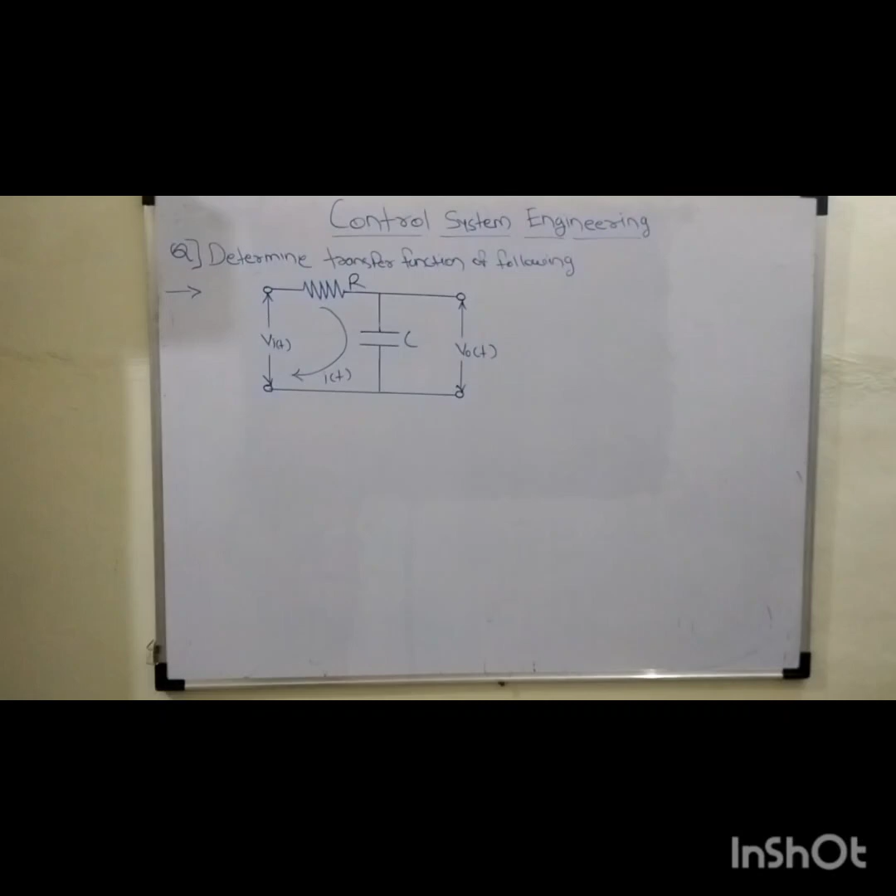Friends, as far as today's session is concerned, we will try to discuss one of the most important parameters of this control system, whose name is nothing but transfer function.

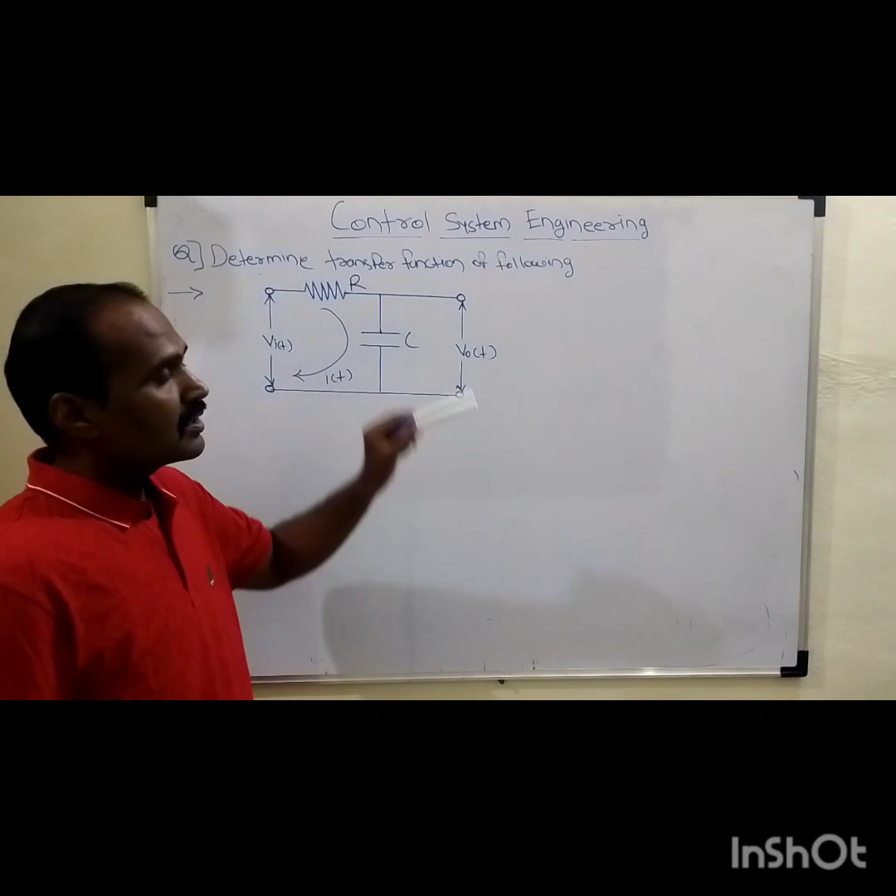As you can see with the help of this graphical representation, we have one type of electrical network with us. Apart from this electrical network, our objective is to determine the overall transfer function of that given electrical system. As we know, this system is nothing but an arrangement of different physical elements connected in such a way that to attain a certain objective out of it. So such type of electrical network we are having with us.

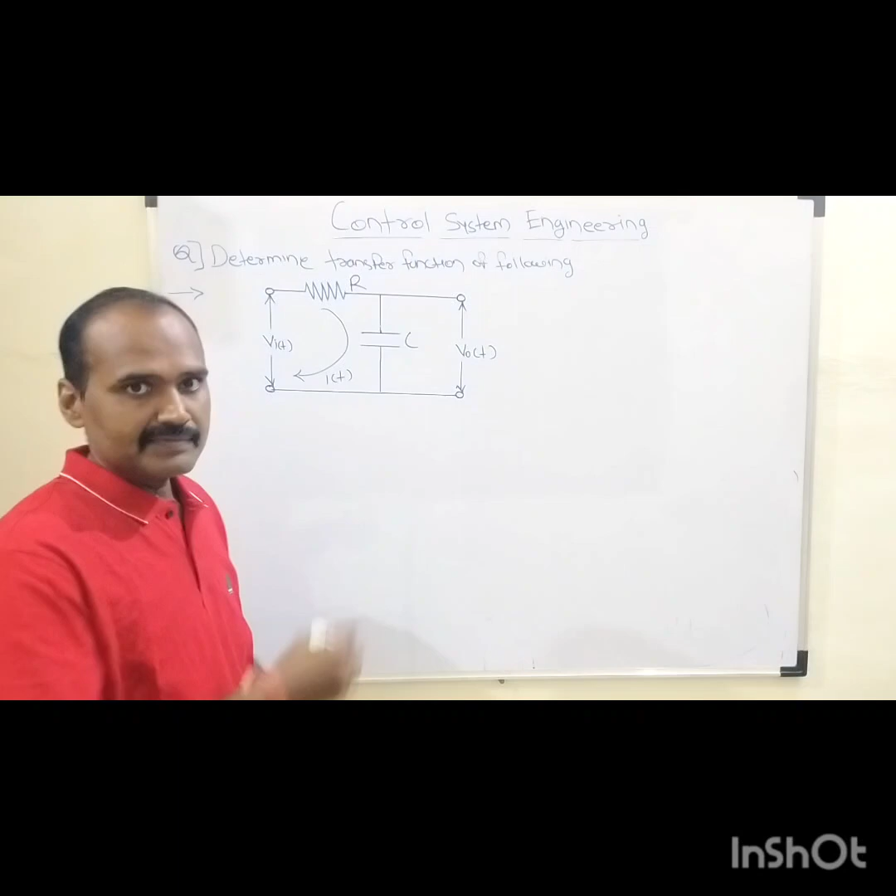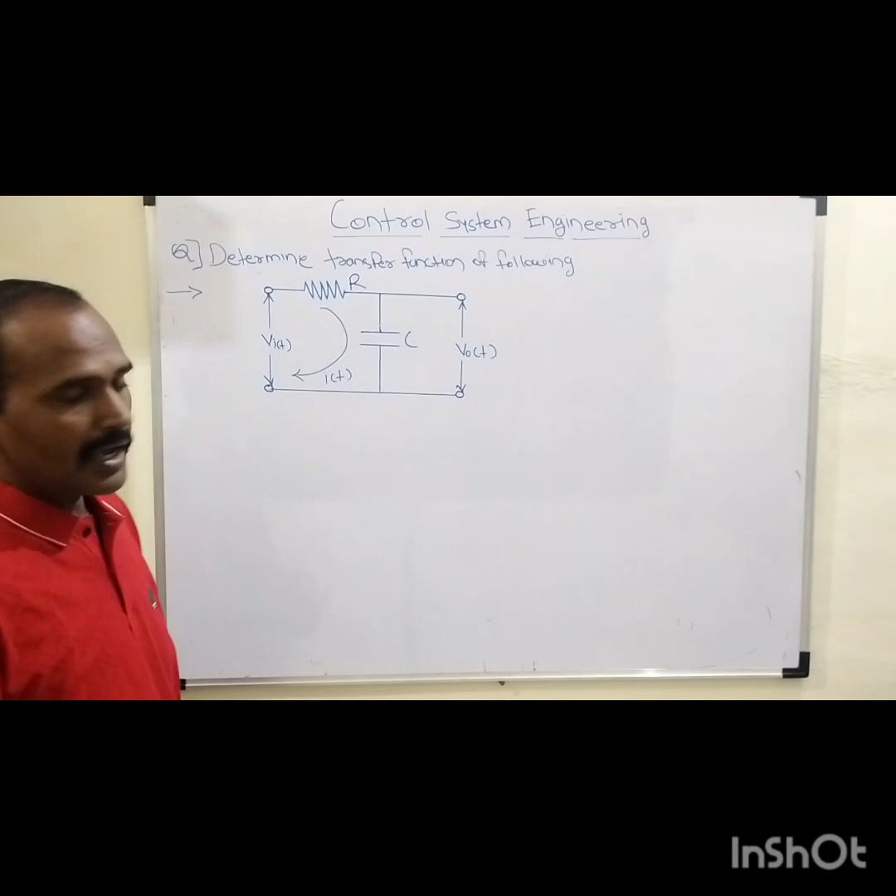Here first of all we need to recall the basic definition of this transfer function. As we know, transfer function is nothing but, it is just similar to the gain of that amplifier circuitry. So the transfer function of this given electrical system is the ratio of output of that system to the input of that system in case of S domain.

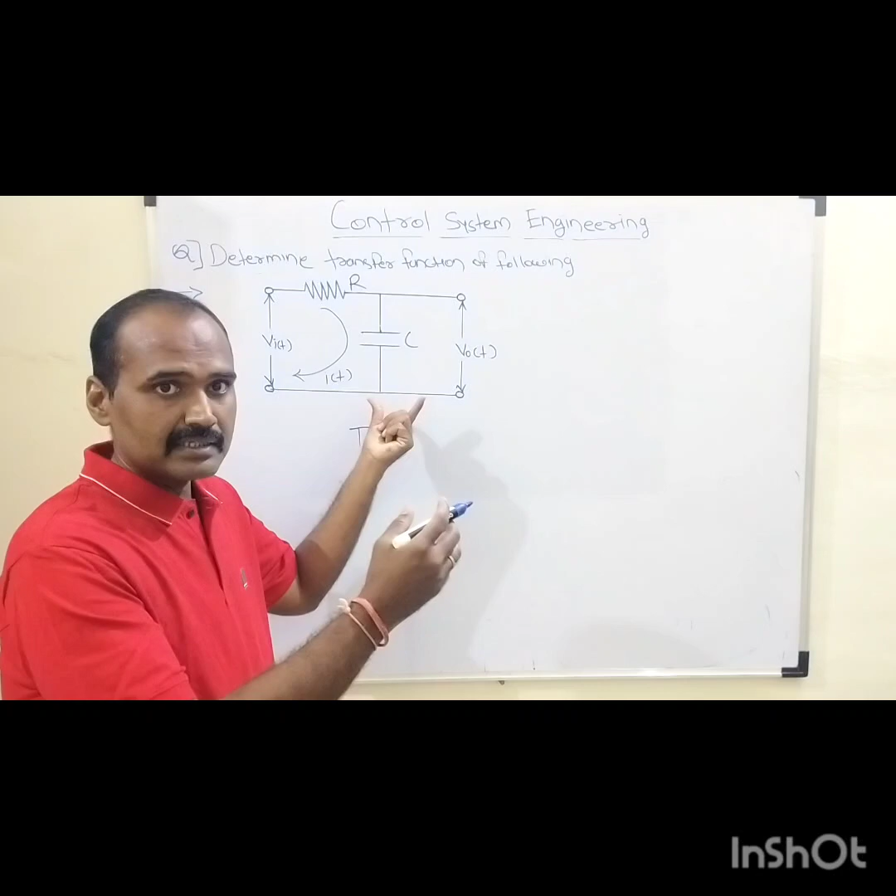But we need to understand that this transfer function is being defined under a zero initial condition. That means, when the overall system is at rest condition, or more prominently we can say that none of the energy component is being stored within each and every element of that system. Such a condition can be called a zero initial condition.

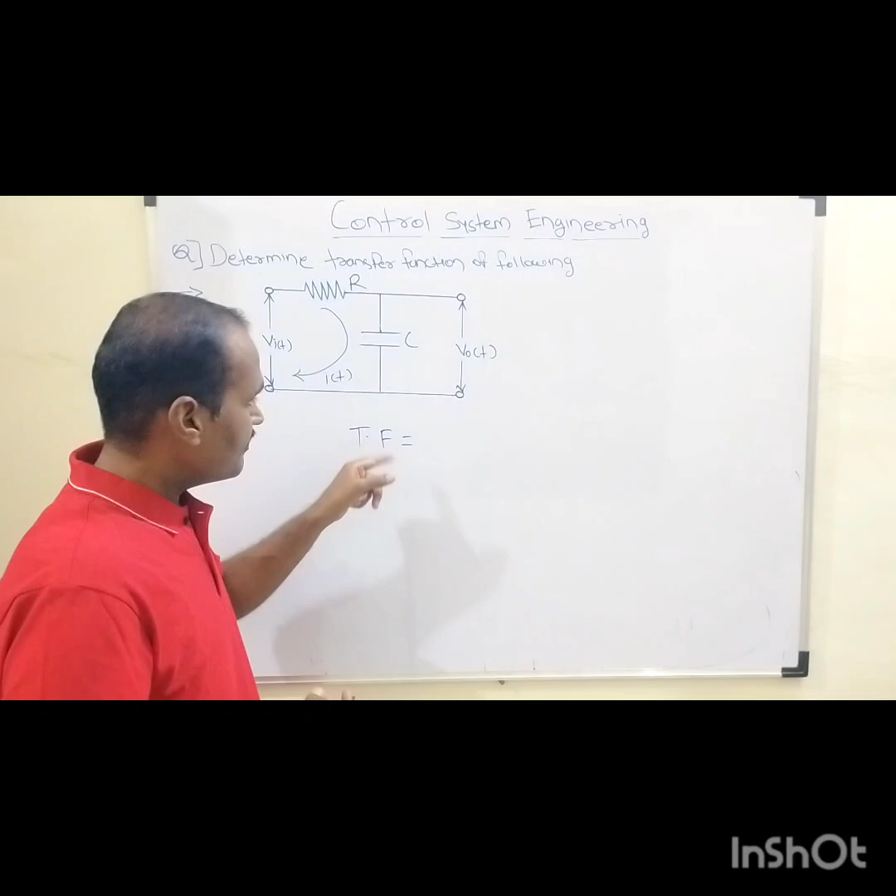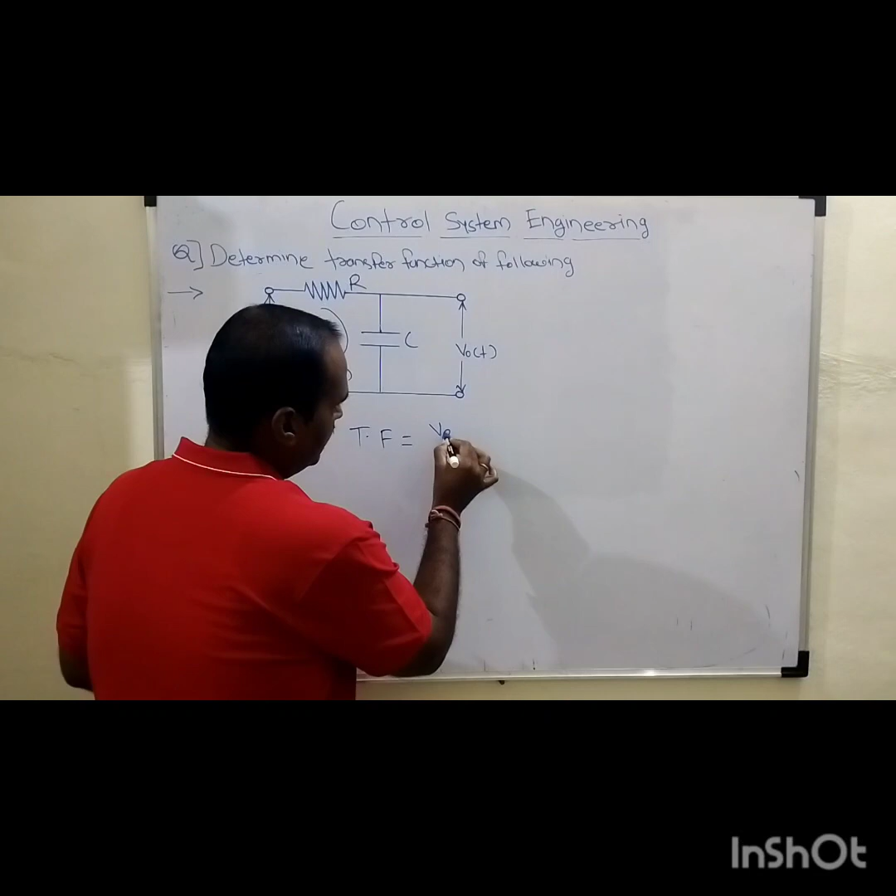So transfer function is nothing but the ratio of output to the input, in terms of S domain. Here output is V0 of t, so its S domain representation will become V0 of S, and the S domain representation of that input is Vi of S. So we are interested to determine the output voltage in terms of S domain and the input voltage in terms of S domain.

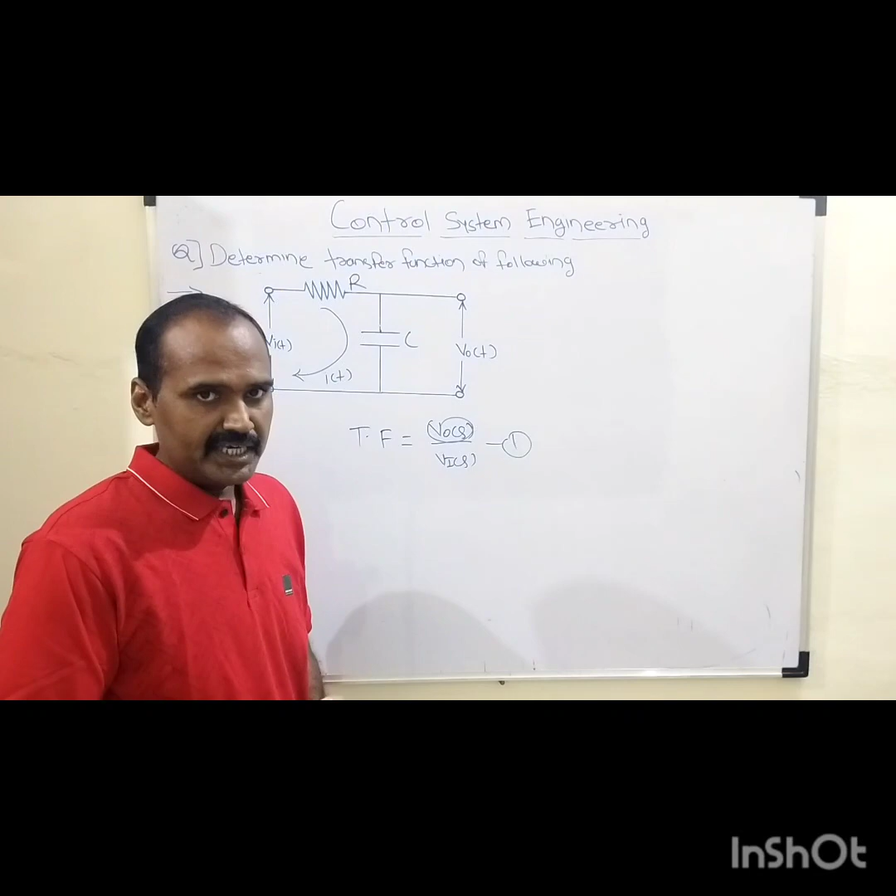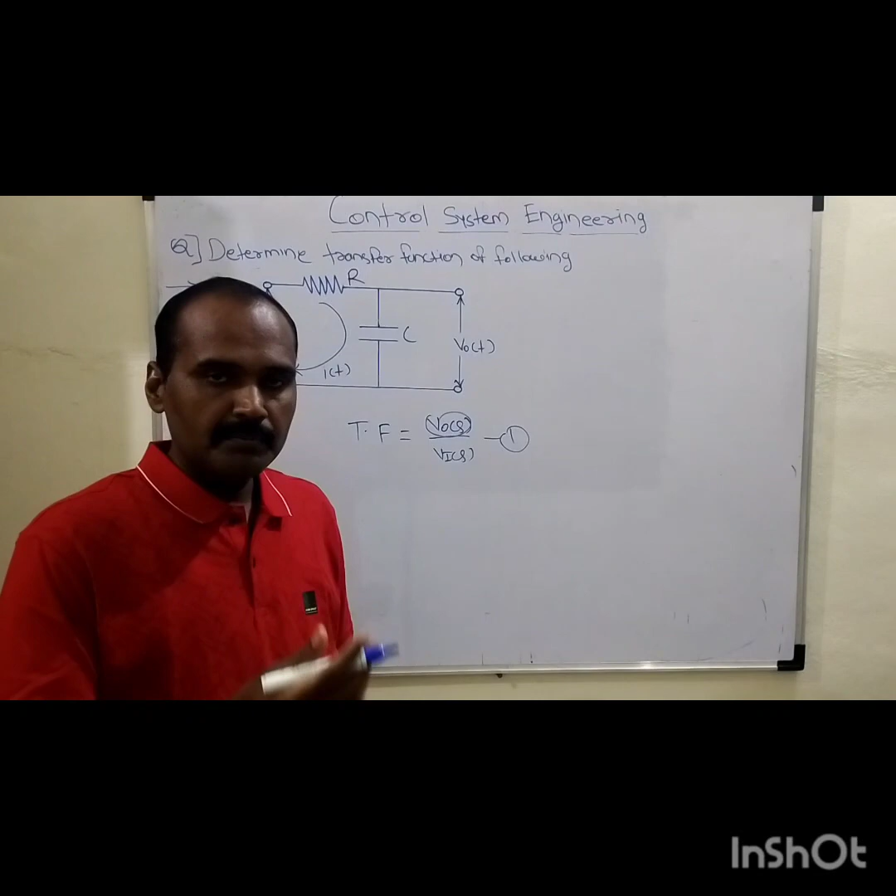Okay friends, so after going through the basic definition of this transfer function, the next thing which we need to do is to determine the time domain expression for this input voltage as well as output voltage.

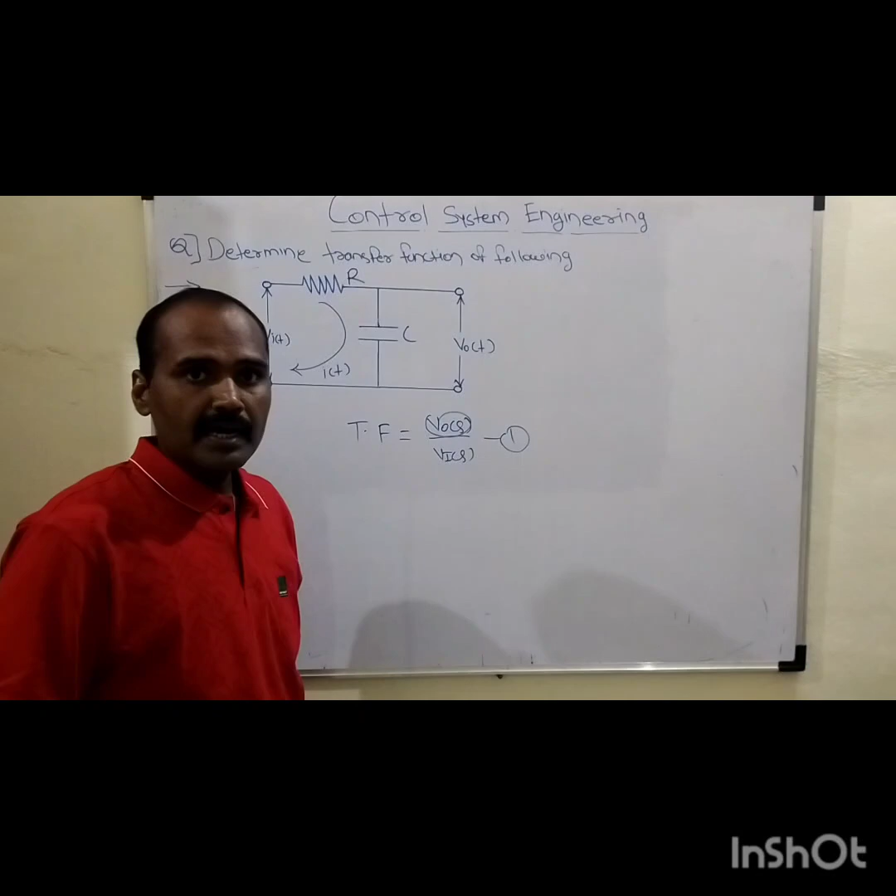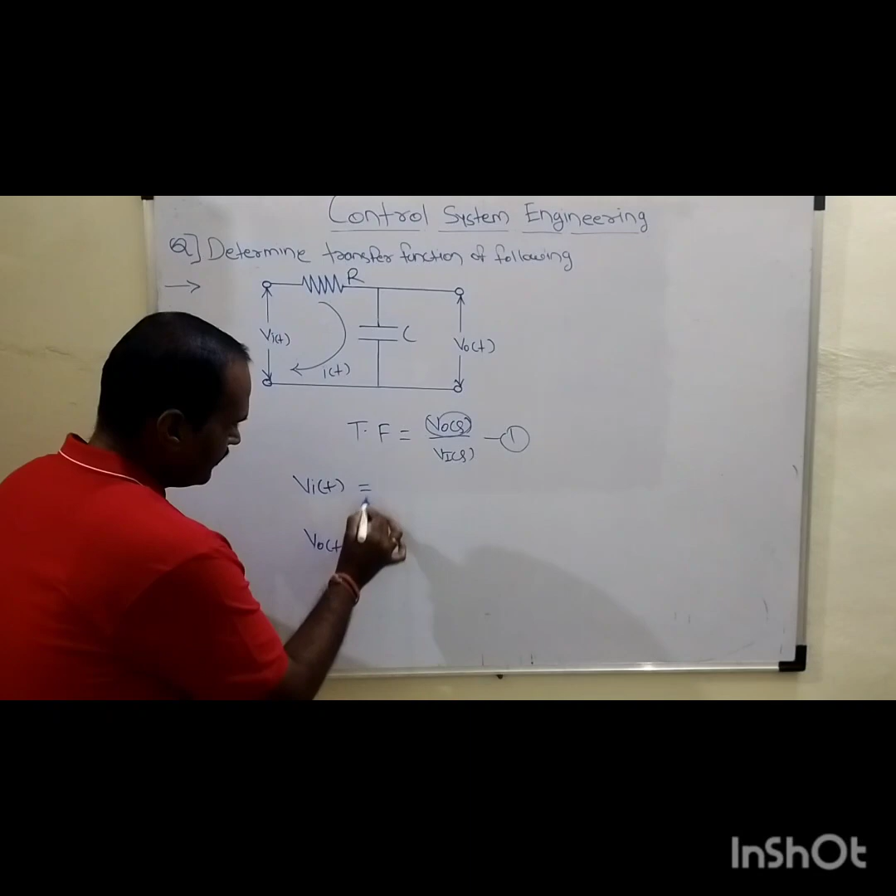As you can see, there are two different components, and obviously these two are connected in series form with each other. Taking into account this circumstance, first of all we need to determine the time domain expression for this input voltage as well as the time domain expression for this output voltage.

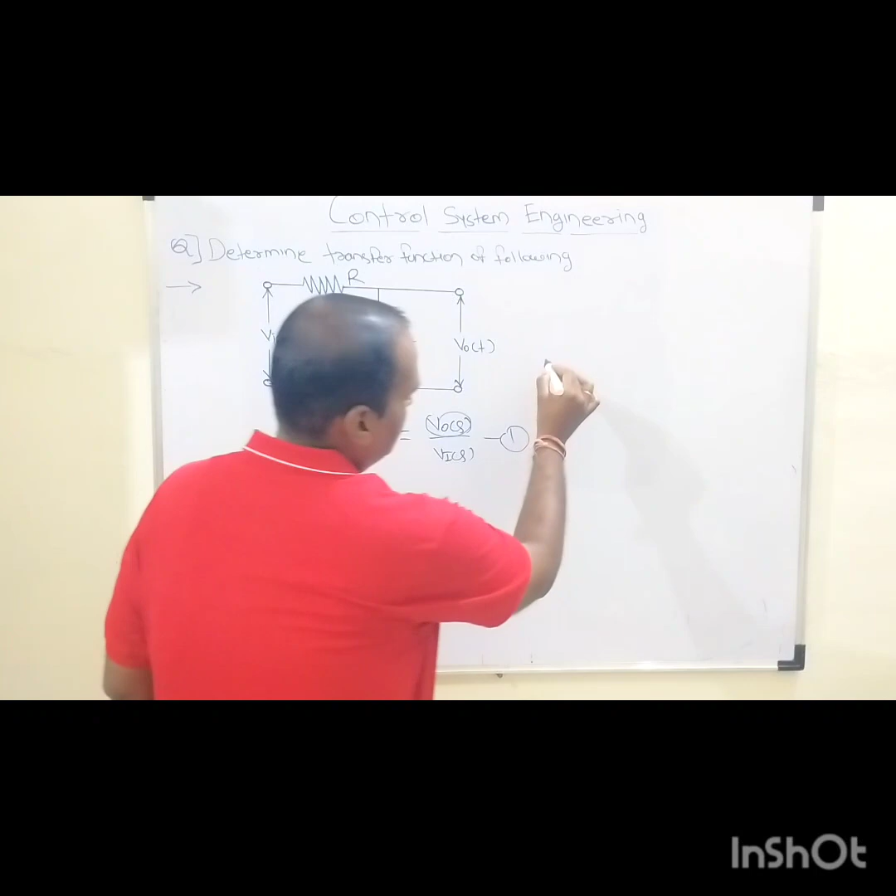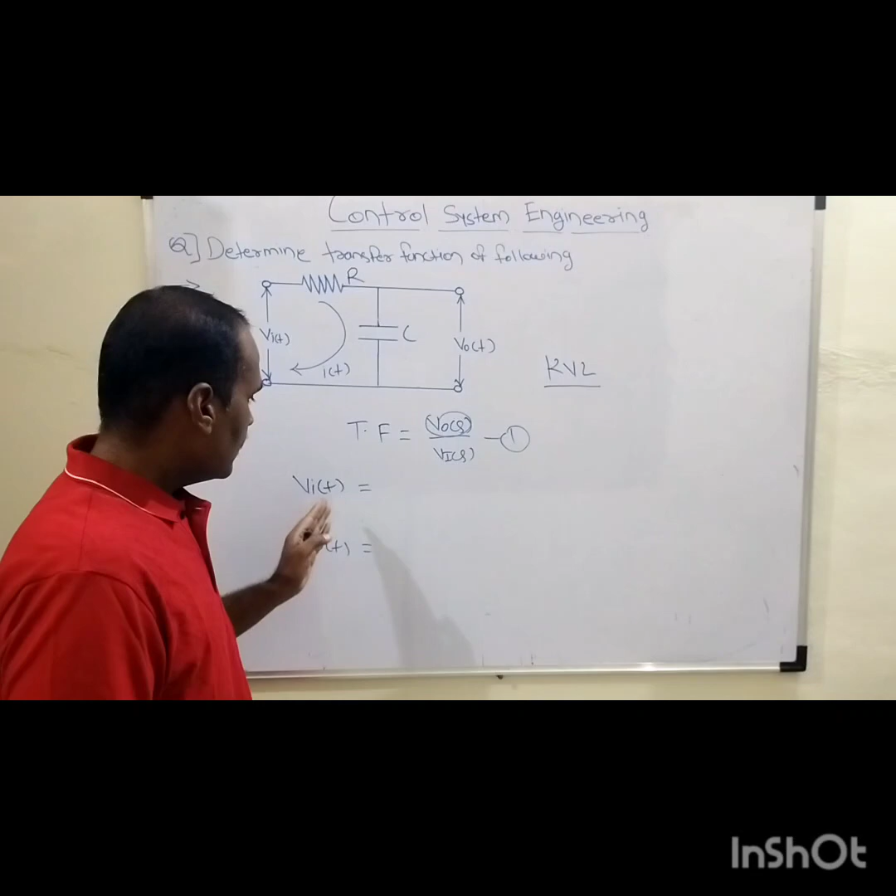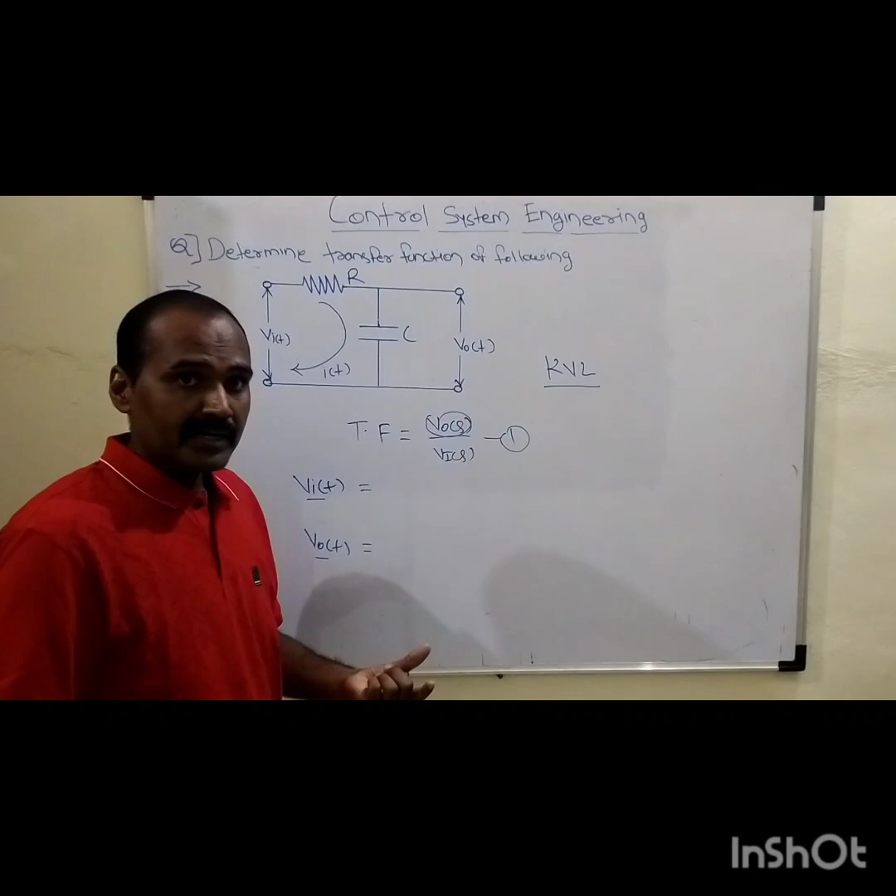In order to determine these input and output voltages, we need to adopt one basic strategy used in electrical engineering for series circuits. The name of that strategy is the Kirchhoff Voltage Law, or more prominently we call it KVL. By the virtue of this Kirchhoff Voltage Law, we need to determine the time domain expression for input as well as output, because the S domain representation of this input and output voltages are required to determine the overall transfer function.

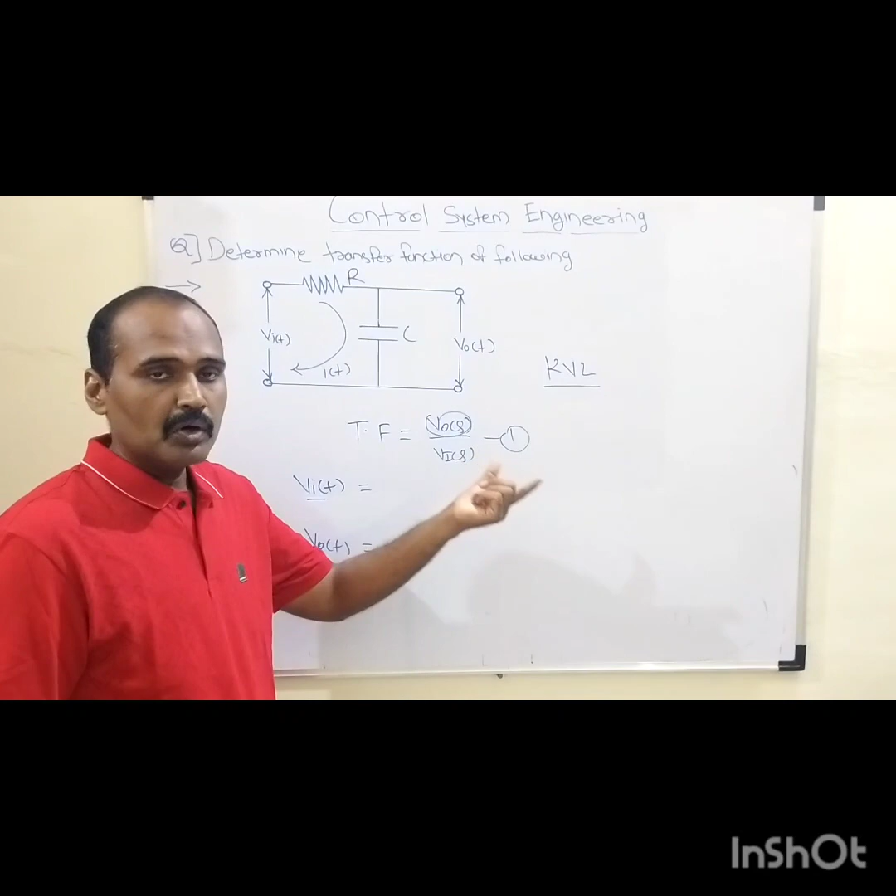As we know, the Kirchhoff Voltage Law is a very simple strategy: the algebraic sum of all ohmic drops are always equated to zero. So when we apply this Kirchhoff Voltage Law to the input side as well as to the output side, let us quickly go through this scenario.

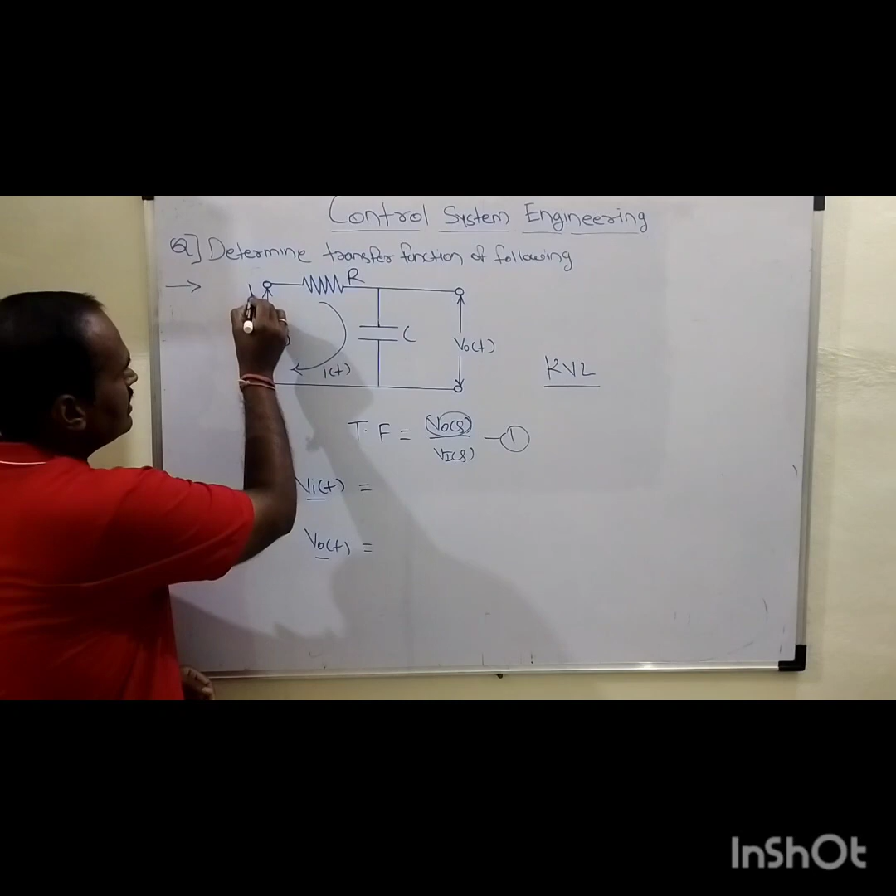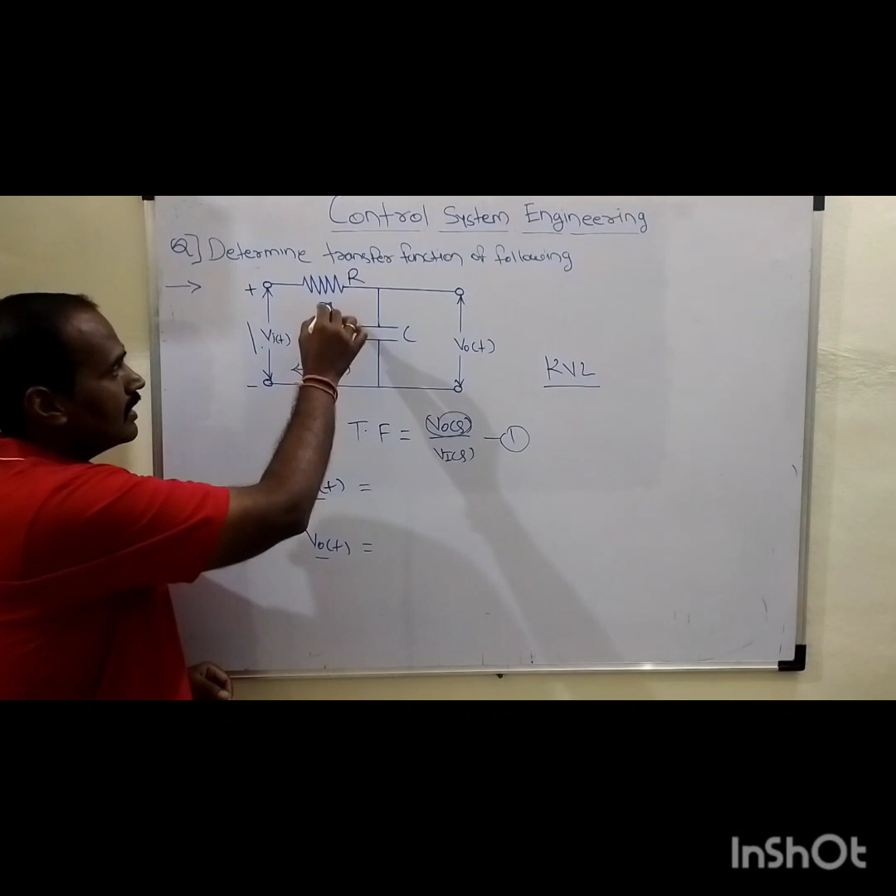When we apply this Kirchhoff Voltage Law from the input side, obviously this is the positive terminal and this is the negative terminal. First of all, that Kirchhoff Voltage Law is applied to this input section. In this input section we have one desired potential, that is Vi of t. The remaining two elements are the resistor and the capacitor.

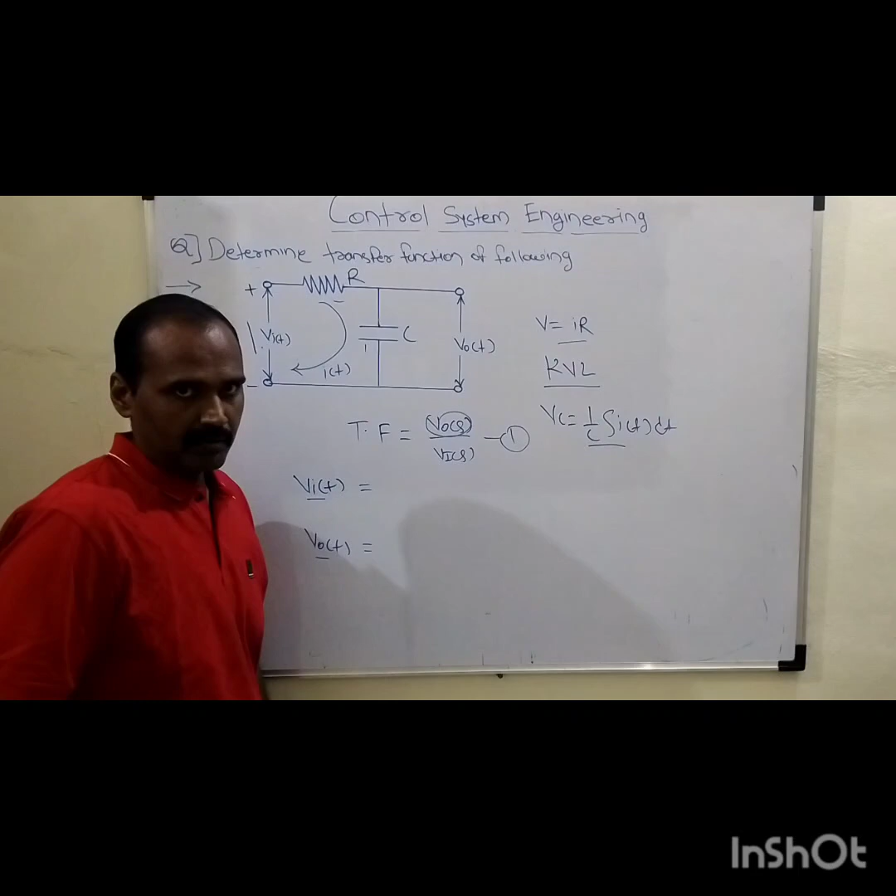According to Ohm's law, we are very much aware that the voltage drop across this resistor is simply I into R, that we need to recall. Similarly, the ohmic drop across this capacitor is 1 over C integral of I of t into dt. These two statements we need to record, because we need them while defining the input voltage as well as output voltage.

So when we apply this Kirchhoff Voltage Law to the input side, the input current is denoted by I of t. The current always flows from positive to the negative terminal, or more prominently we can say it always flows in the opposite direction as compared to the direction of electrons. The direction of current is always opposite to the direction of electrons, flowing from positive terminal to negative terminal. So the direction of current is here what?

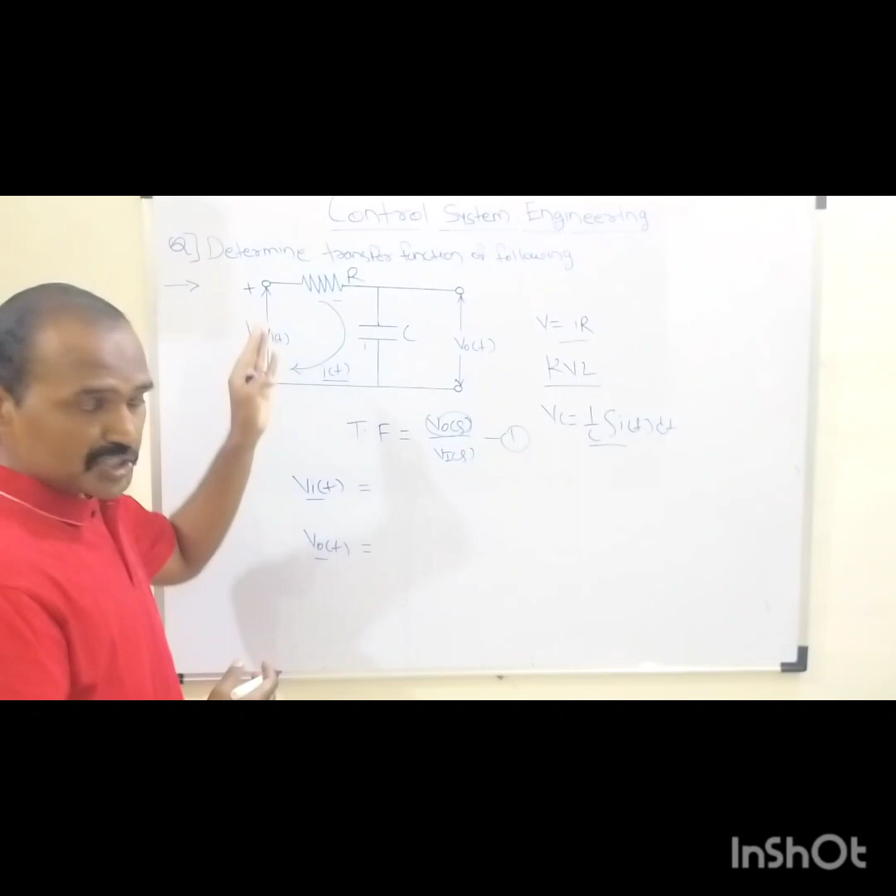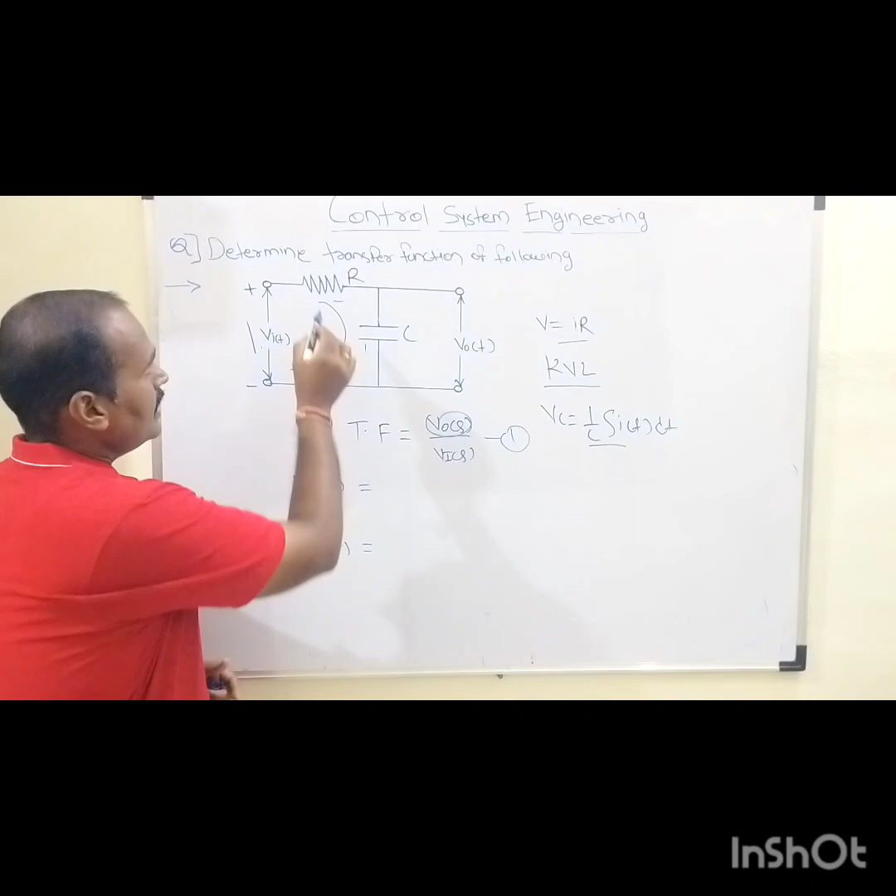Is in clockwise direction. So carefully we need to follow this clockwise direction while applying Kirchhoff's voltage law. So accordingly, how does this I of t current flow through this resistor connected in the horizontal arm? Obviously from its left hand side to the right hand side. So we need to mark the polarity. Similarly, how that current flows from this capacitor which is connected in the vertical arm, from top to bottom, right?

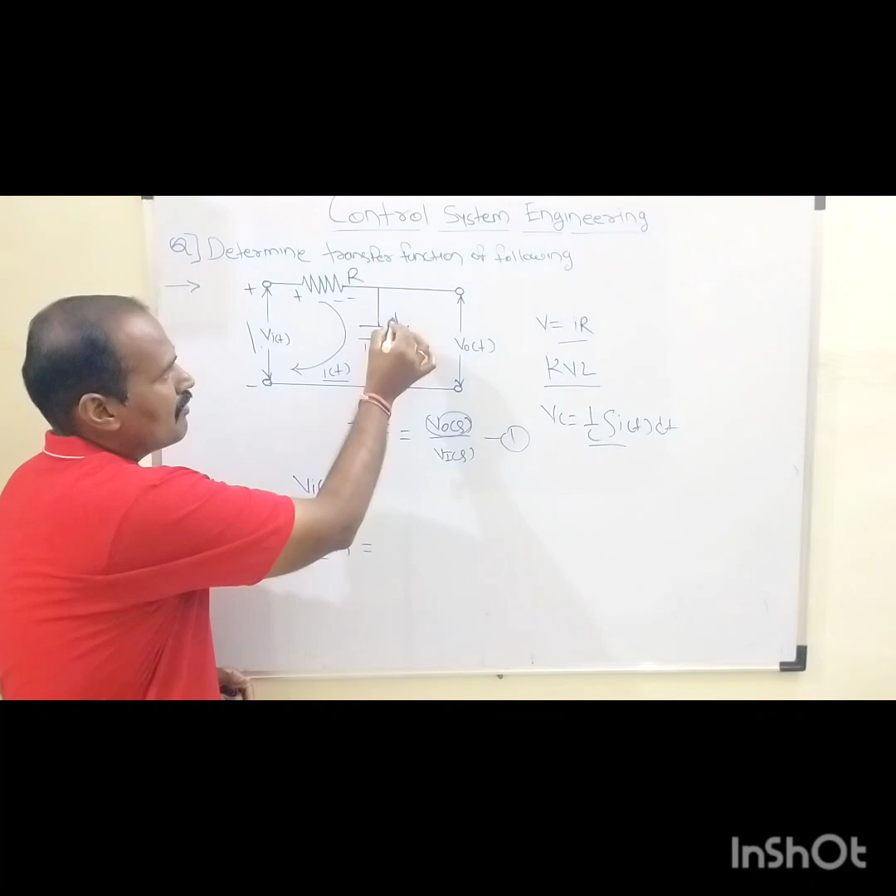So when we apply this Kirchhoff voltage law from this negative terminal, we are going from negative plate to the positive plate. So that's why the overall potential of this Vi of t is nothing but what? It will become positive, right?

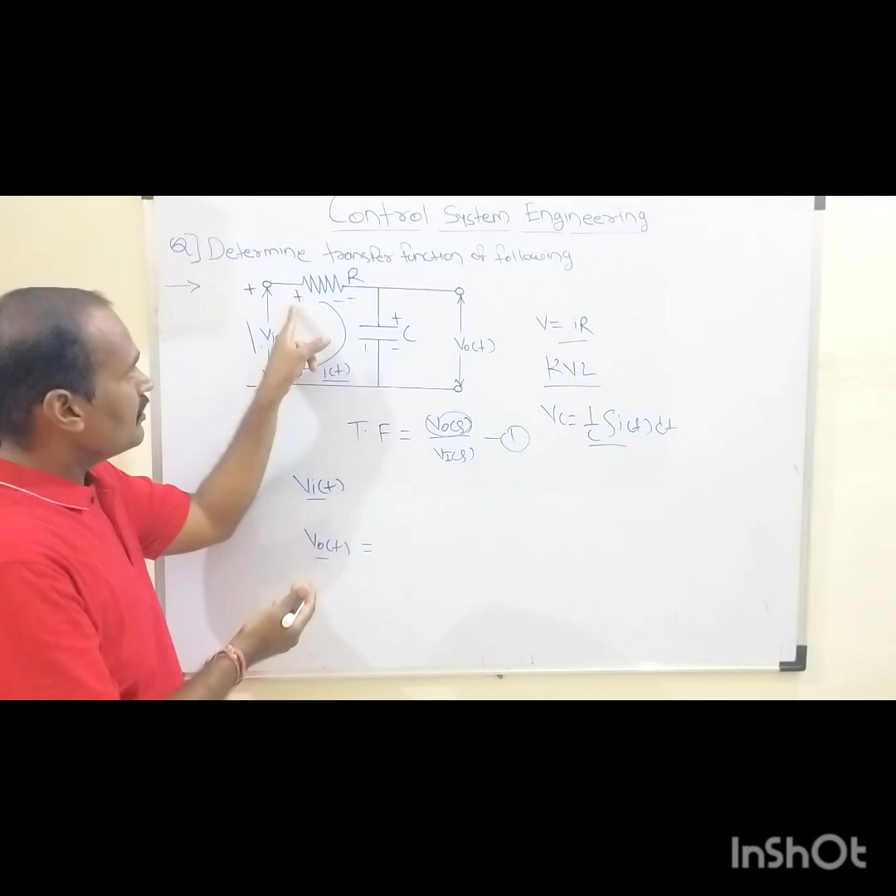When we consider the ohmic drop across this resistor R, at that time we are going from positive to the negative plate. That's why the overall polarity of this ohmic drop across that resistor is denoted by a negative sign. So obviously it will become R into I of t. That is nothing but the ohmic drop across that resistor.

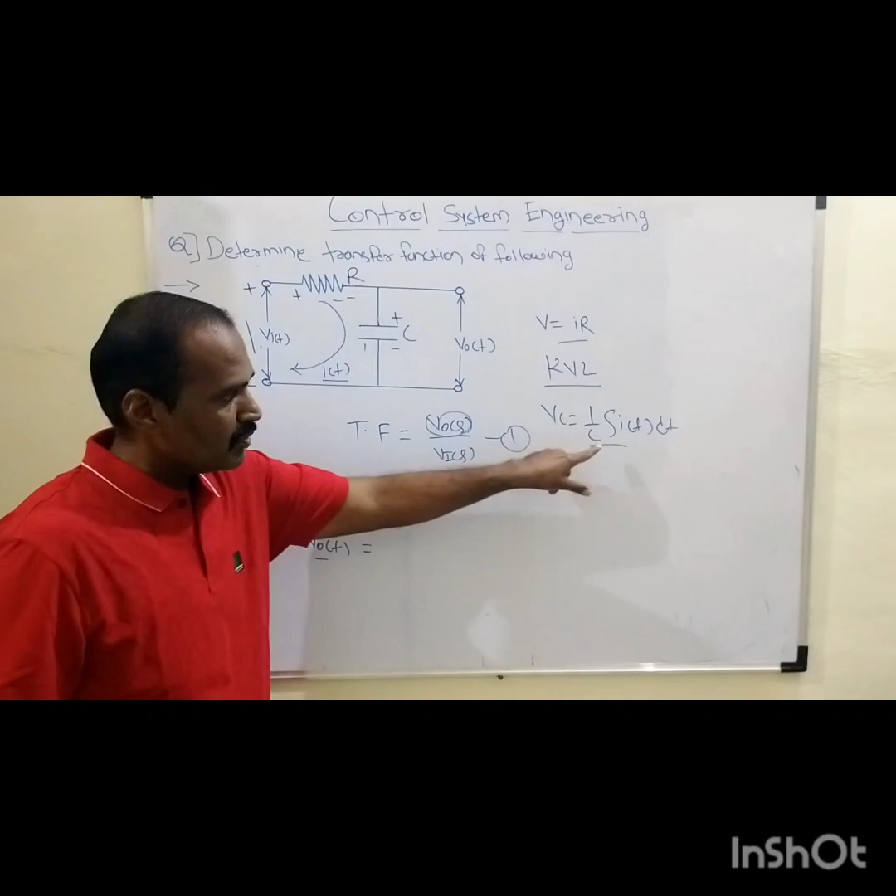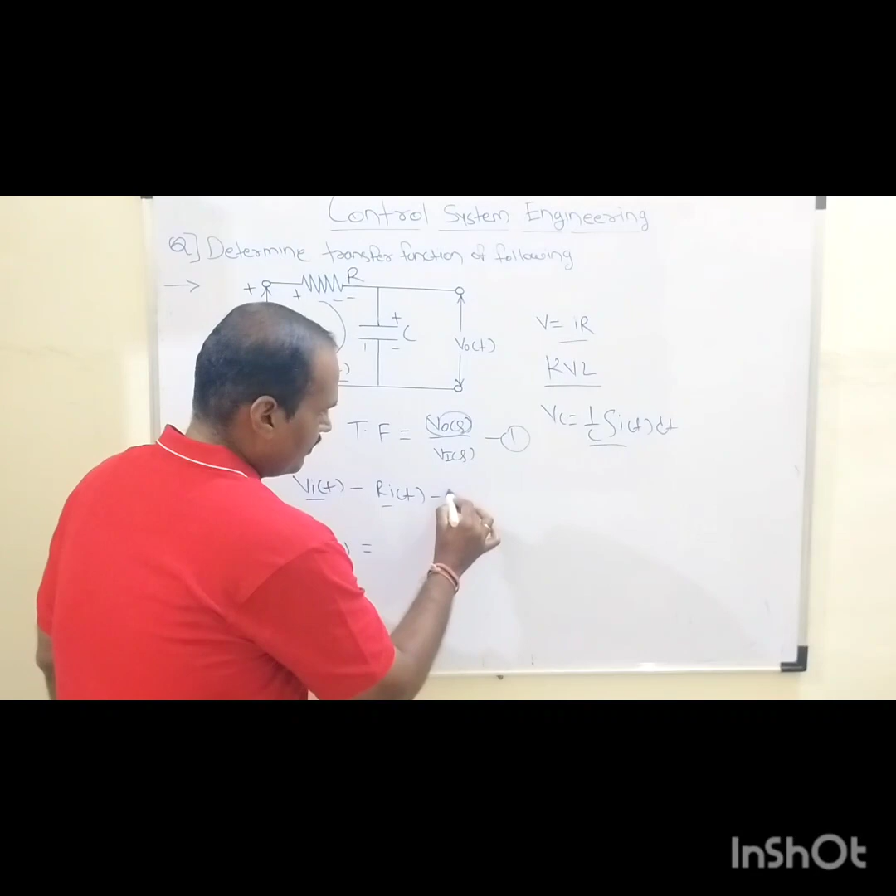Similarly, the ohmic drop across that capacitor, the time domain expression is 1 over C integral of I of t into dt, right? Here we are going from top to bottom side as it is connected in the vertical arm. So obviously the ohmic drop across that capacitor will be negative. So minus 1 over C into integral of I of t into dt. So this is how this statement will look like.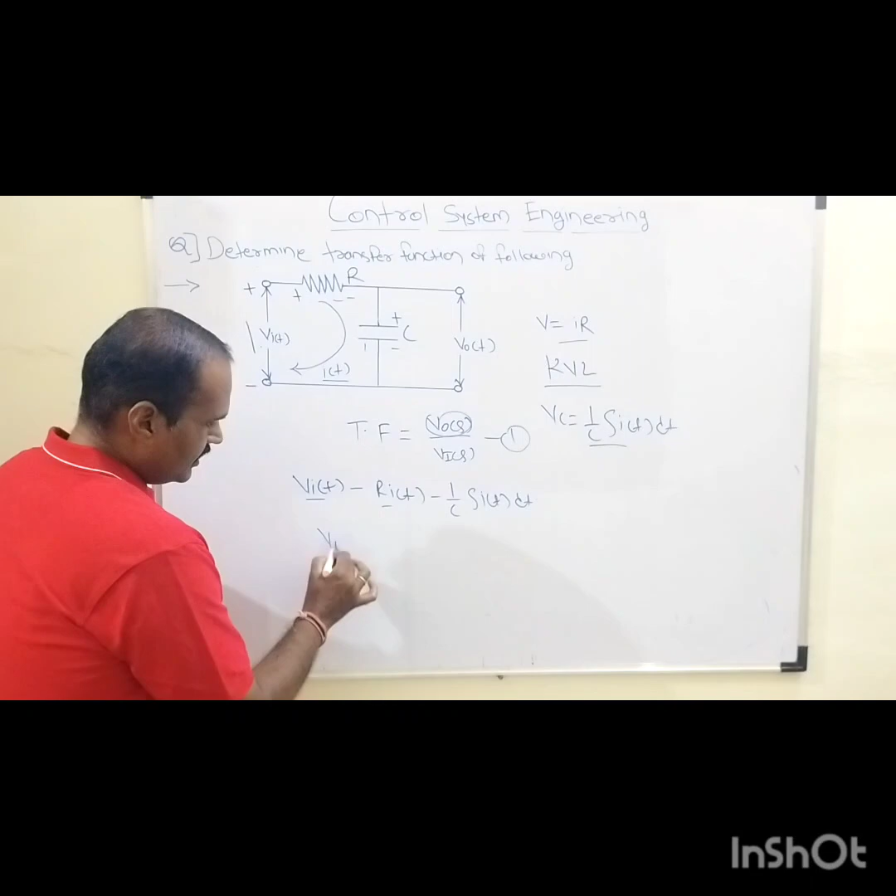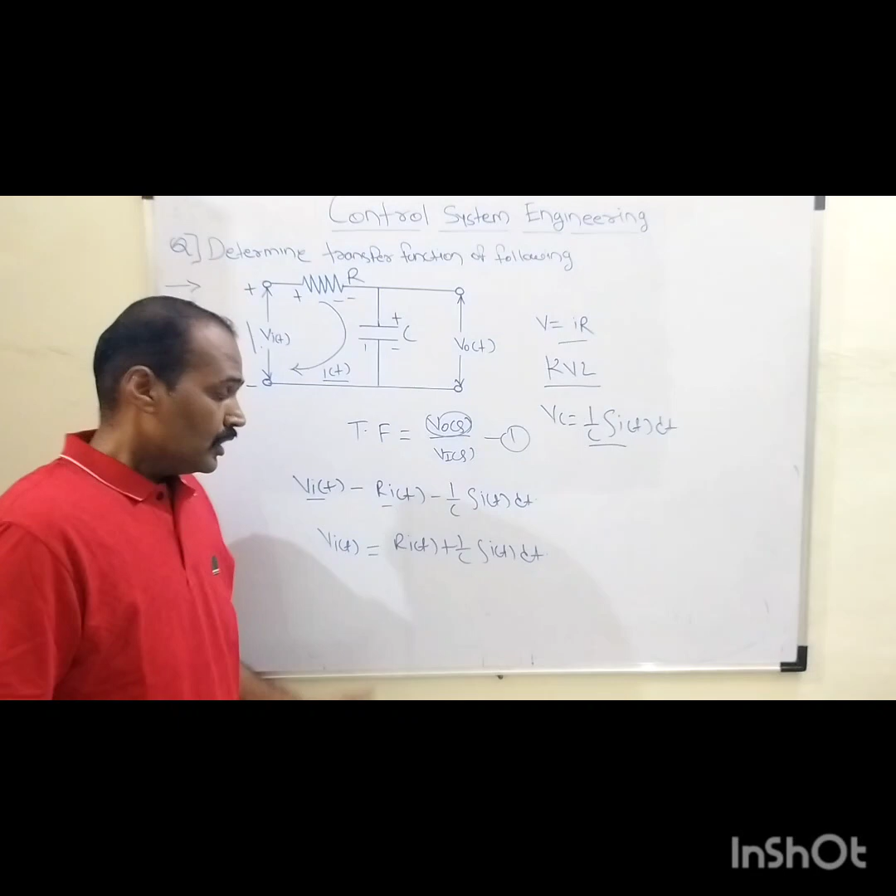When we rearrange this term, we come to know Vi of t equals R into I of t plus 1 over C into integral of I of t into dt, right? So this will become the time domain expression for input voltage.

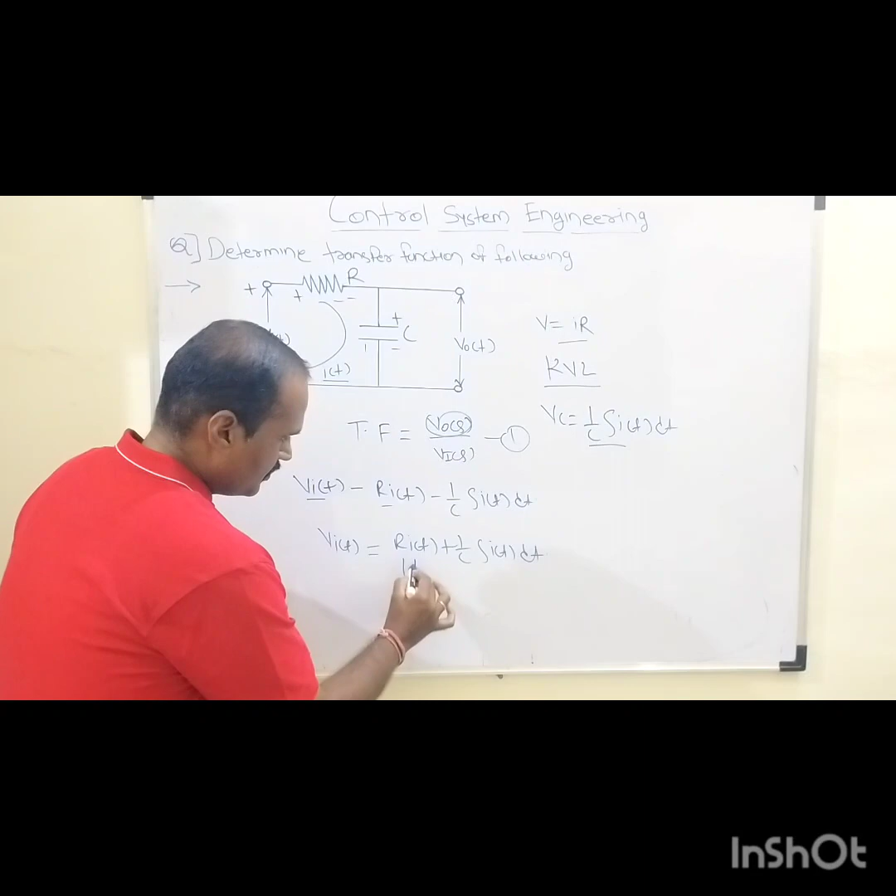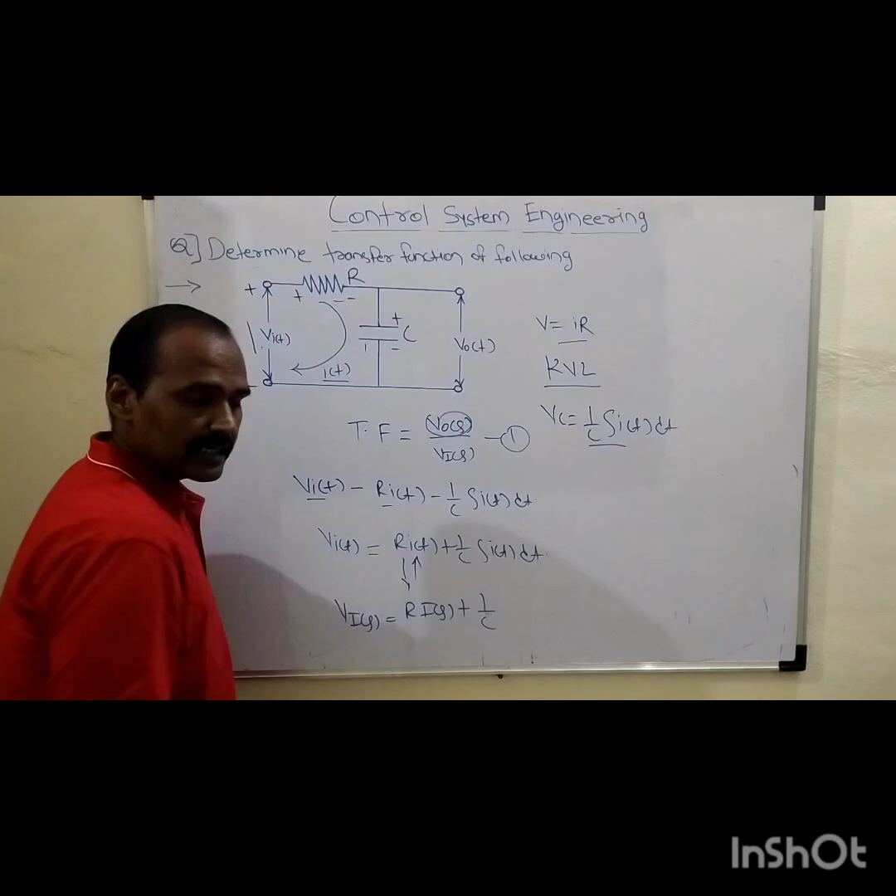We want this input voltage in terms of S domain. So when we apply the Laplace transform to this existing statement, it becomes Vi of s equals R times I of s plus 1 over C, as we are having the integral sign, so the Laplace variable will become 1 over Cs followed by I of s. So this is how equation number 1 becomes.

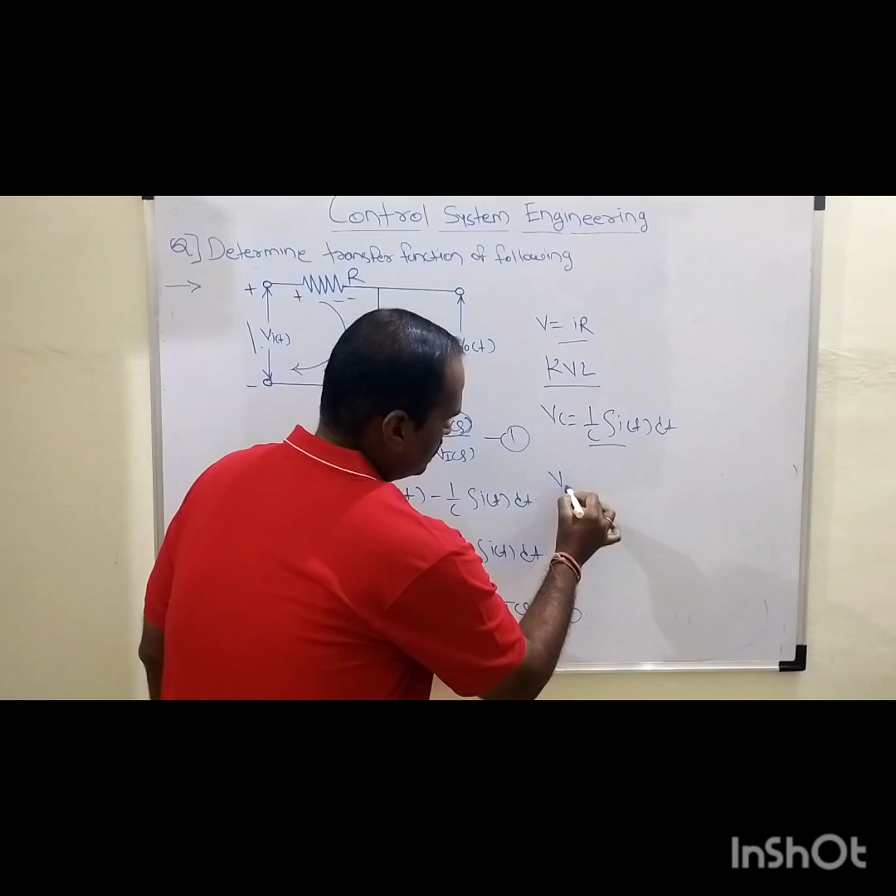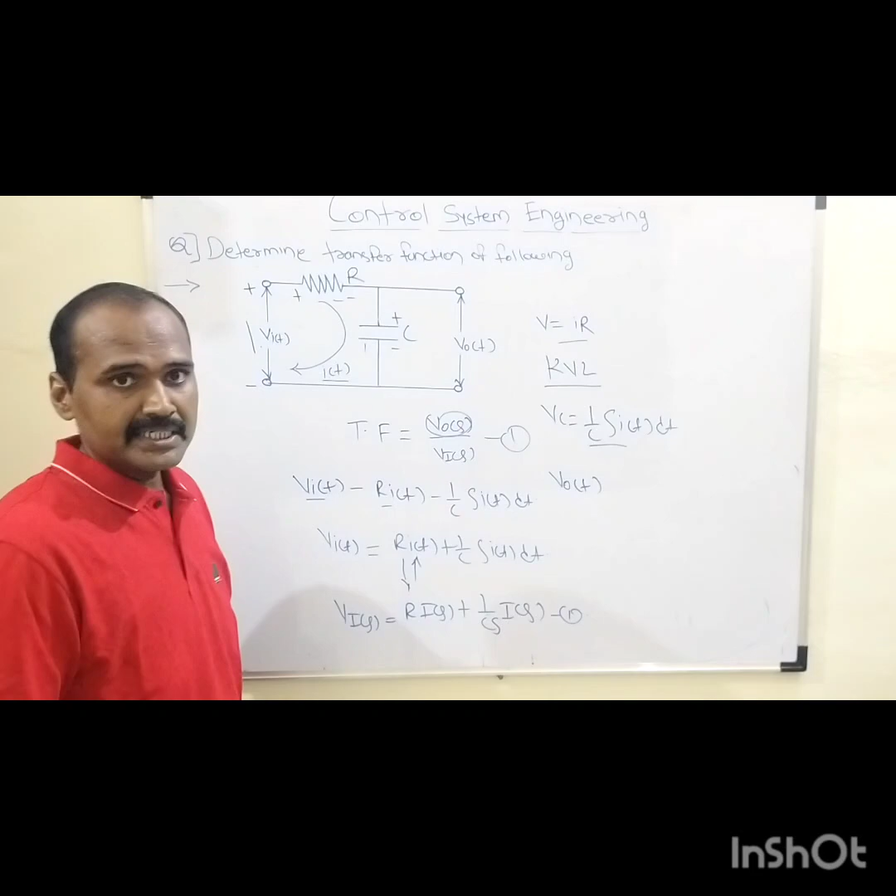In the same manner, when we apply the Kirchhoff voltage law to that output side, similarly such type of expression we are getting on the output side. We are having one potential, that is V0 of t, and the output is obtained across this capacitor C, right? How are we mapping this capacitor? When we apply the Kirchhoff voltage law from the output side, we need to follow these two polarities. We are going from top to bottom, right?

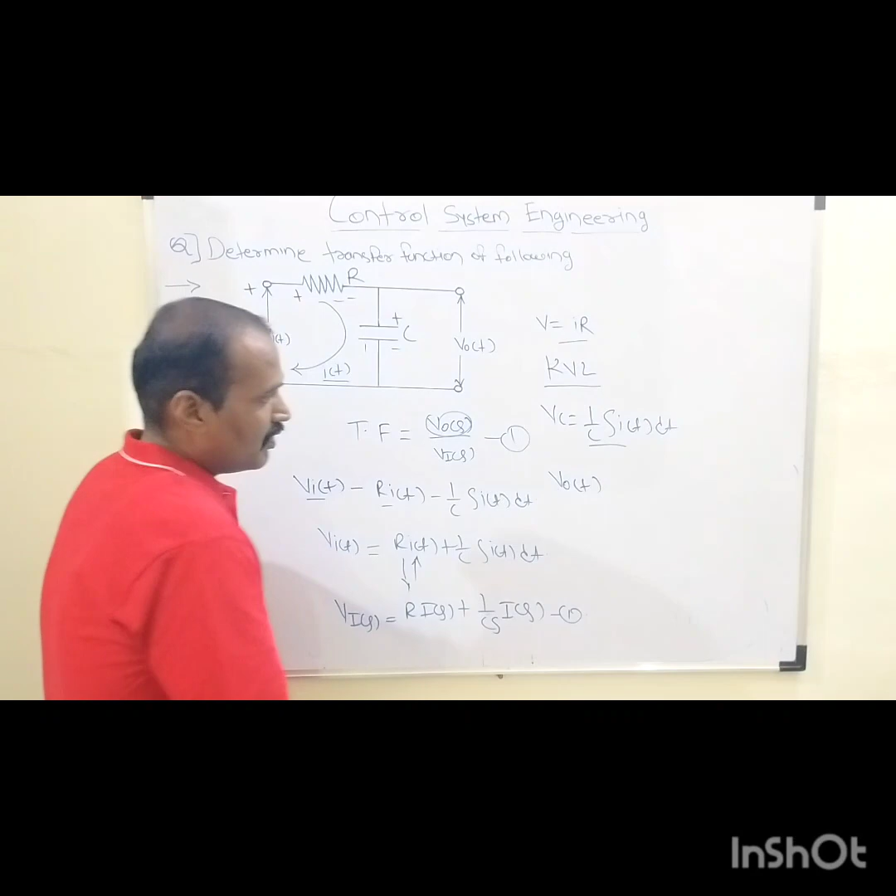So V0 of t minus the ohmic drop across that capacitor, it becomes V0 of t minus 1 over C into integral of I of t into dt. So finally V0 of t equals 1 over C integral of I of t into dt, right?

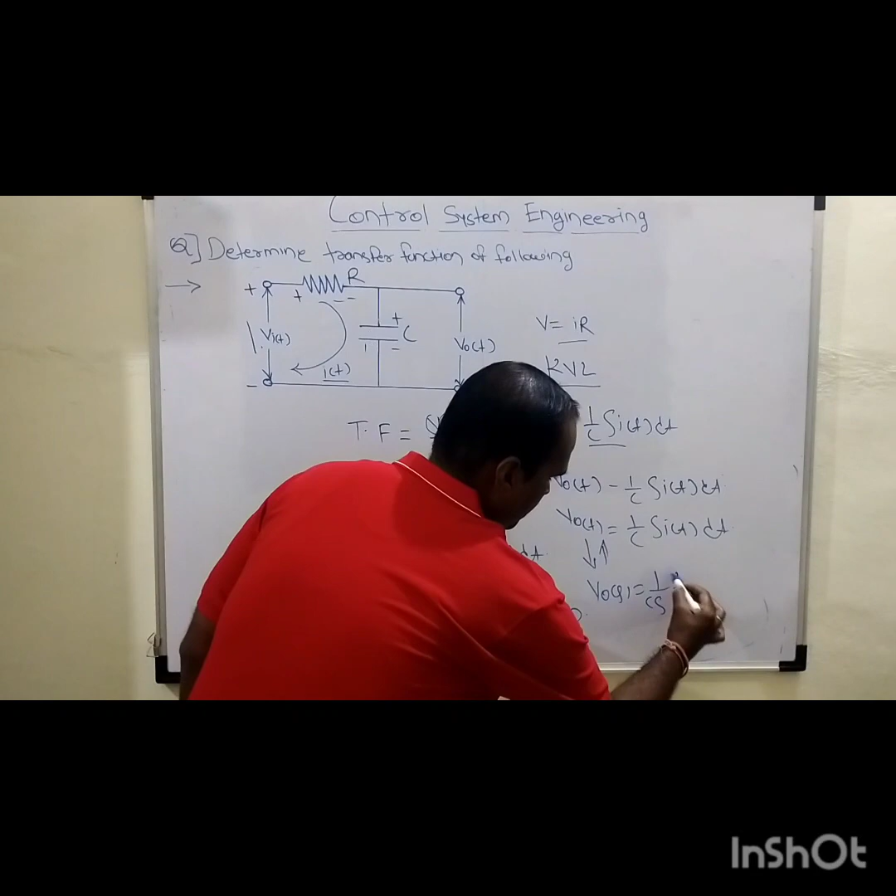And when we apply the Laplace transform, it becomes V naught of s equals, again the Laplace variable will be 1 over s, so 1 over Cs followed by I of s. That can be called equation number 2, right?

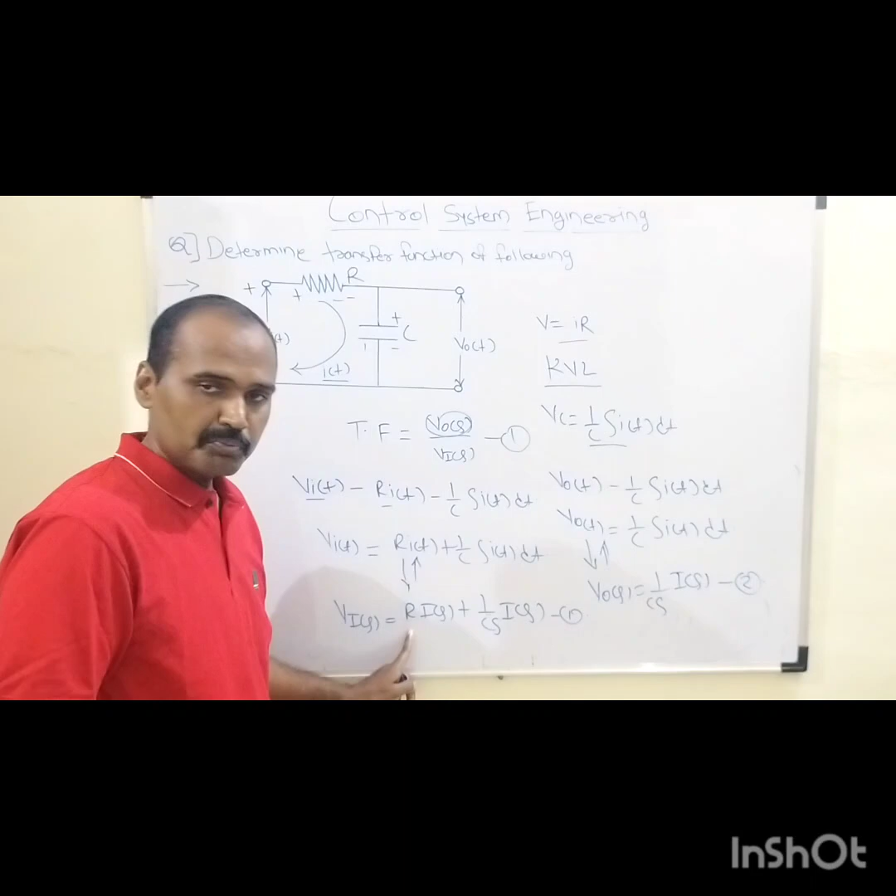Now the transfer function is nothing but the ratio of output voltage to the input voltage in terms of S domain, right? So here when we equate these two equations to determine the overall transfer function, initially we need to consider equation number 2, which is 1 over Cs into I of s. Its denominator will be equation number 1.

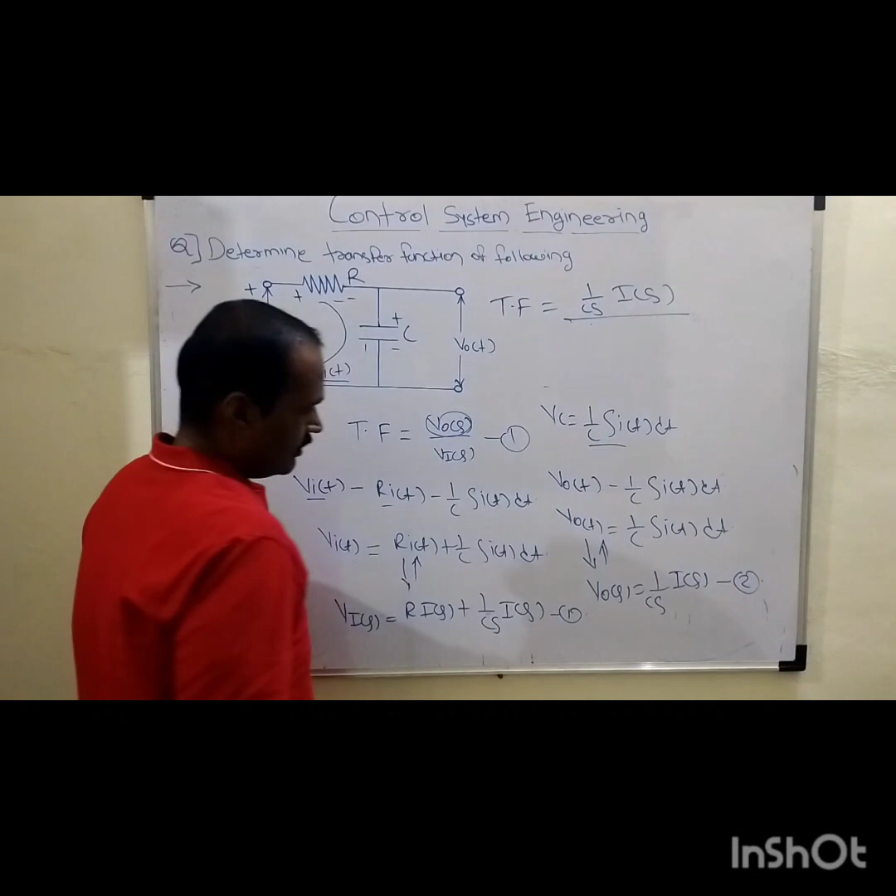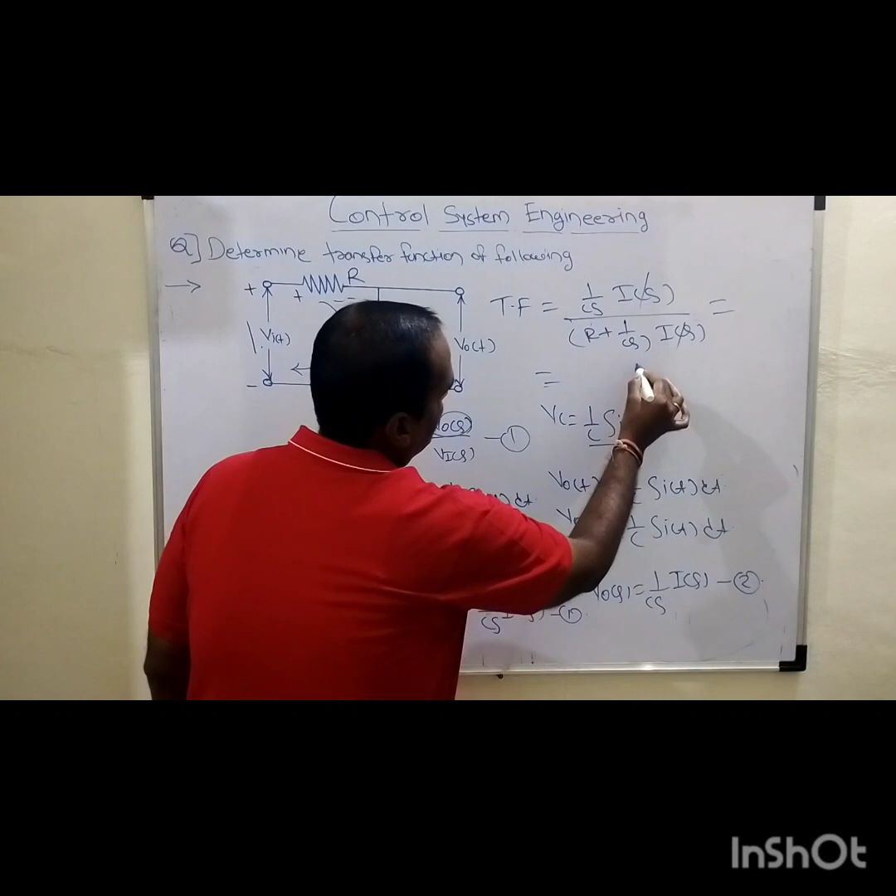Here while considering this denominator, a few mathematical simplifications we need to look out. Here I of s is a common term, so the remaining coefficient will be R plus 1 over Cs, into I of s. So finally this I of s gets cancelled, and again it gets cross multiplied. So the answer is 1 over RCs plus 1.

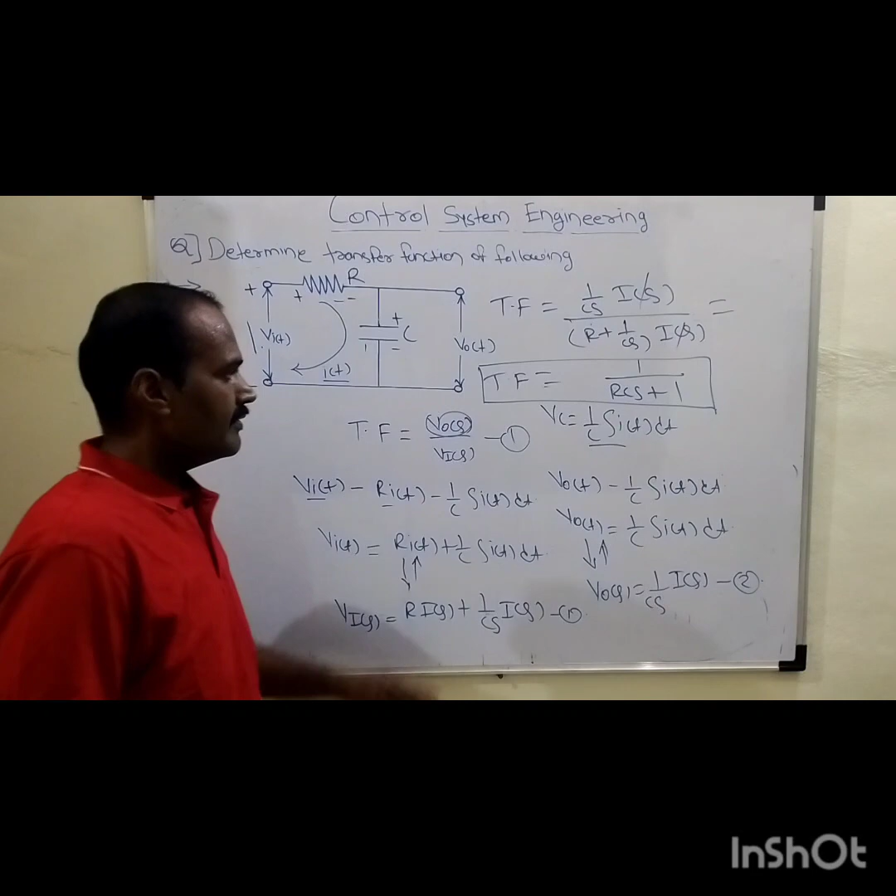The term which is written within this rectangular box is nothing but the overall transfer function of this electrical system.

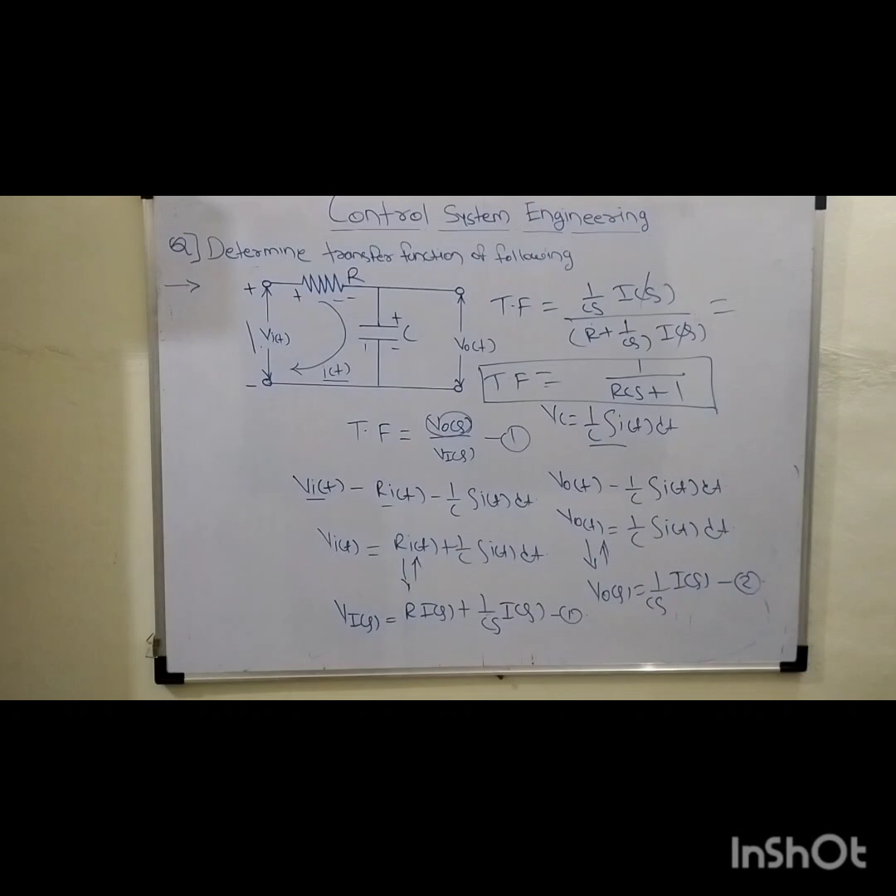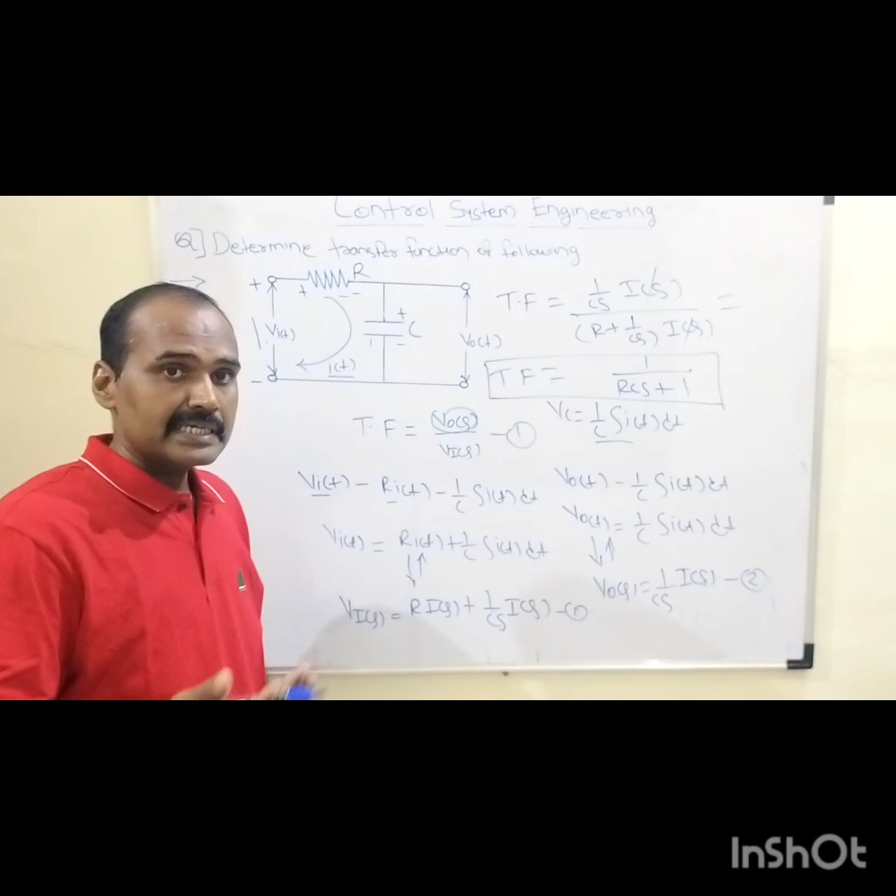So friends, in this way we had tabulated the transfer function of this given electrical network, which consists of two identical elements, resistor and capacitor. So by the virtue of this Kirchhoff voltage law, we can determine the transfer function of any kind of electrical network which can have these three identical elements like resistor, inductor and capacitor.

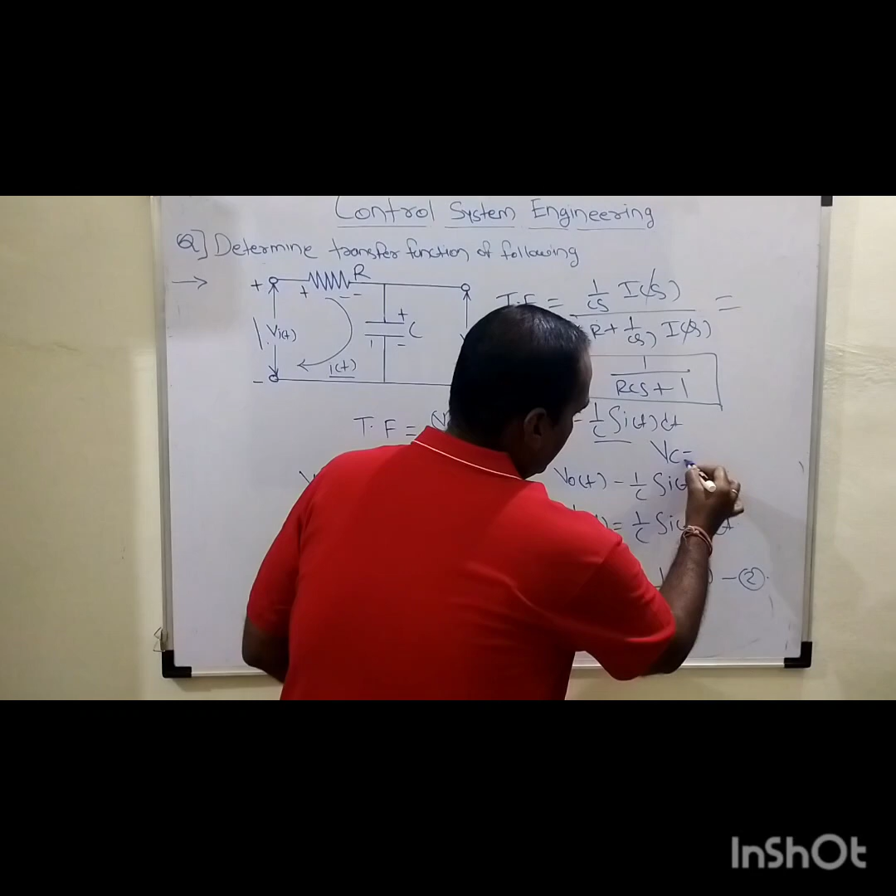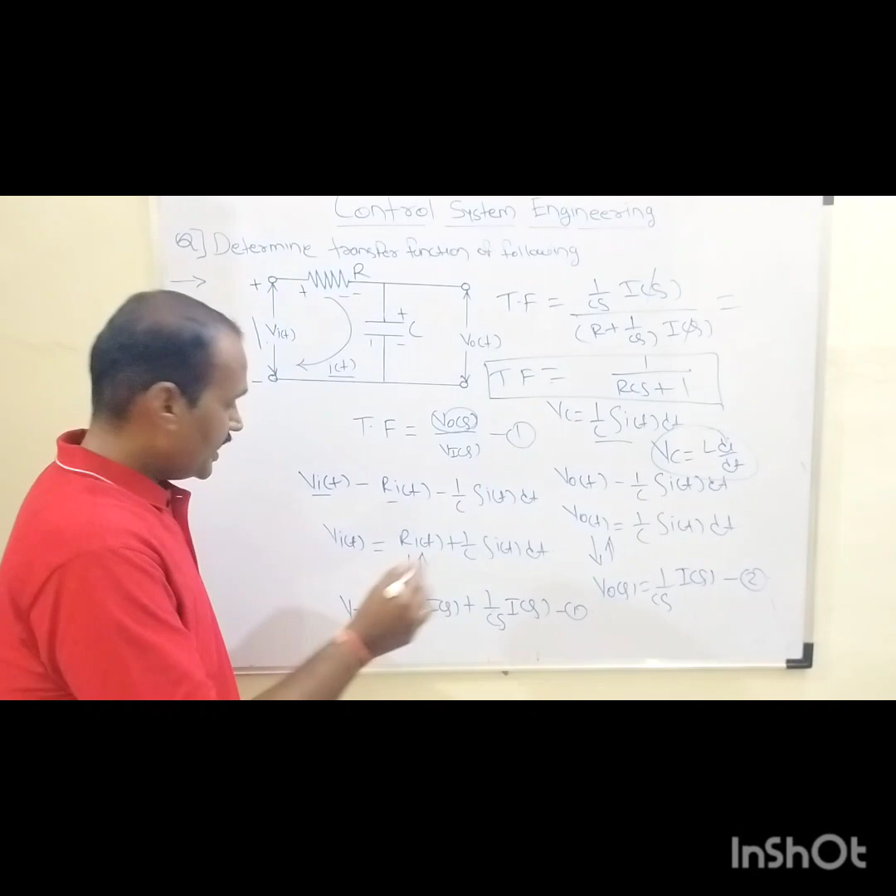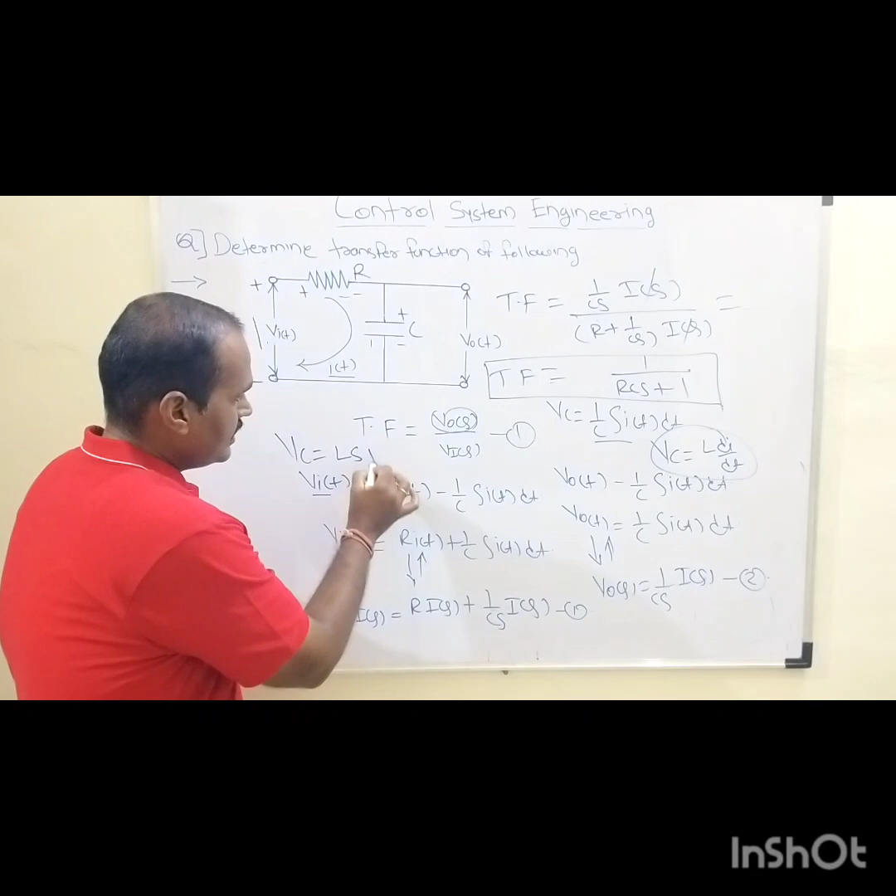If we are having an inductor in that circuitry, we again need to recall the time domain expression or ohmic drop, how to represent the voltage across that inductor. It is denoted by Vc equals L into di by dt, which we need to consider when an ideal inductor is connected into that circuitry. Obviously its S domain representation becomes Vc equals, as we are having the differentiation sign, it is a first order differentiation, so the Laplace variable will be S, Ls into I of S. So in this way that term is to be represented whenever we are having an inductor connected in that circuitry. So in this way the overall transfer function is to be tabulated.